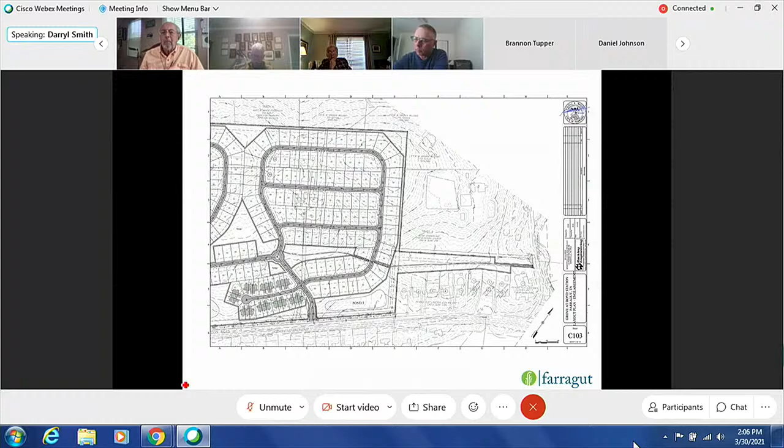My second comment is I heard the discussion today a little bit about some road improvements on Boyd Station. Can somebody talk a little more about that? Darryl, do you want to talk about that a little bit? There's still a little bit of a question about whether or not we're going to have curb and gutter, but we're looking at two 11-foot lanes with a 2-foot paved shoulder on the south side. It would be more or less moving the northern edge of pavement 4 feet out from where it is now.

Preferably at least a 6-foot grass strip over to a 10-foot mixed use path. I'm not sure where that puts the trail with regards to overhead utilities. Russ, you can speak to that.

Yeah, I think the key there is at least a 6-foot grass strip, it may be 30 feet in some places. The trail may need to diverge from being closely parallel to the road in order to get on the other side of the power poles and work its way roughly parallel to Boyd Station. So I think we'd all agree that would be fantastic.

Russ, I did have one question about being able to drain. If we have curb and gutter, do you have elevations as far as the pipes that go under Boyd Station? Yes, I do. Can you send those over to me? Yes, I'll have to get it in a format, I still have it in survey data format. Okay, I haven't got that far yet.

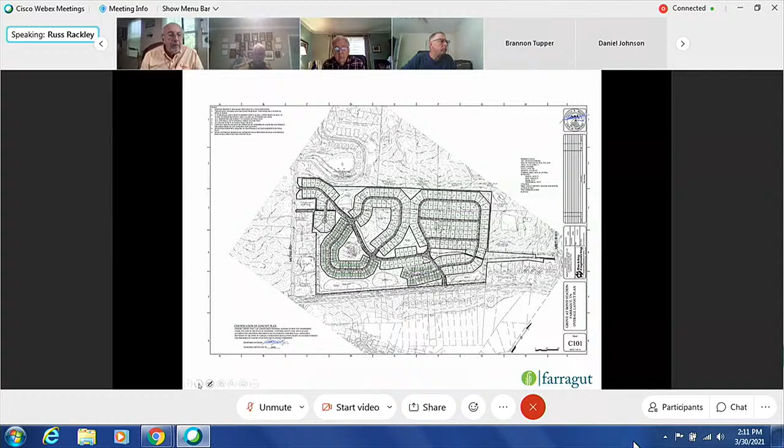Okay, I have one more comment if I can. At the entrance to the development, from the traffic circle over by the park there, if you go in and then take your first right into that little cul-de-sac, those properties along the road there abut 2 or 3 large residential lots that are McPhee Road lots. Will there be any kind of buffer of trees or anything between the development properties and the existing properties? I'm reading Tiffany, Plato, and I can't read Stokes, I guess it is. Will there be some buffers between the existing residents along that road?

Yes, Commissioner Greene, there's a 25-foot common area strip and a 50-foot periphery setback required.

So there'll be no structure within 50 feet of their property line, and any existing tree line through there would be maintained within that 25-foot buffer or 25-foot common area strip.

So I don't think there's any trees there, though, is there? Yeah, there is. The old fence line has some trees on them. It's not a wooded area by any means, but the fence line, or they maybe those property owners' trees, where

they were screening themselves from the cattle farm or the hay field or whatever it used to be. I'm not sure, but we can pull up.

I probably can't get to an aerial that fast, but if you look at - I bring it up because I'm pretty sure we'll probably get a comment like that from the property owners. So you may want to give that some thought.

It would seem to me that, these folks, it seems to me like when I rode down through there, it looked like you could look right through those yards into the field. I don't remember any trees there. So now they're going to look right in their backyard and they're going to have a row of houses immediately on their, I understand there's a buffer zone there.

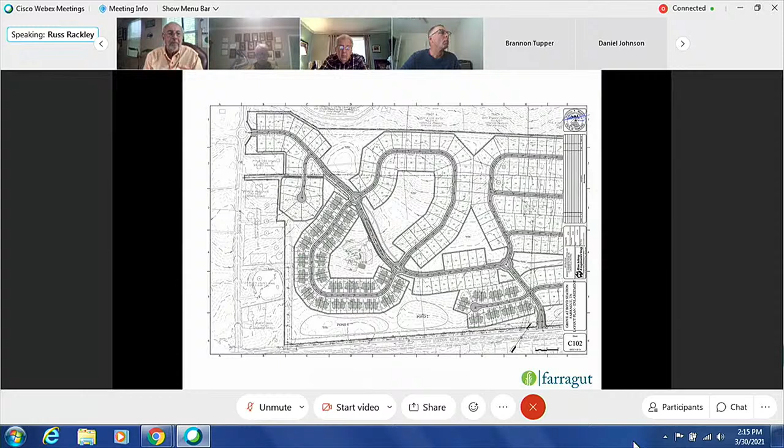So, Russ, I can pull up the aerial if you'd like me to share that. I don't know. I mean, I don't want to get into the weeds on this. Okay, we'll do what we need to do. Maybe I don't want to get into the weeds, but I think I just did.

Oh, sorry, I'd already hit that. No, you're okay, say no more. I think it just went away. I hope it just went away. Yeah, okay, I'm good. That's definitely something we can look at, Mark, but

we'll just see. I think we're already proposing a lot more trees than required, based on replacement trees, because there's not a tremendous amount of trees out here. You think that's crazy for 130 acres, but it's been 98% hayfield for as long as I've been alive that

I can remember, so at least the last 40 years. So other than the old tree lines or old fence rows, that's about the only trees there.

And I'm sure there's some significant trees there that we'll have to calculate a replacement for. But there's no area laid out that's like a big dense wooded area that you would naturally want to save. It's just wide open field separated by fence lines.

So Mark, could you go back? Mark, could you go back to your drawing again? I'm sorry, say that again. Could you bring up the concept drawing again? I'm looking at just - is it not on there?

Is it back up? Nope, all right, let me see if I can get it here. Not sure if that's... Yeah, there, it's up now. Yeah, you got it, all right. Okay, did you have a question about it?

I was looking at the dimension of that buffer zone right where your marker is. It's 25 feet between the residential, at its most narrow place. It's a little misleading on this, it looks tiny, but it's really at least 25 feet, and obviously wider in some areas.

Does this new development have jurisdiction over that 25 feet? The Planning Commission actually has the final say on the buffer arrangement in the OSMR or OSR. On the Ivy Farm subdivision north of Union Road, lots that backed up to Saddle Ridge were required a buffer because the lots are right up against existing house lots, similar to some of this development. Those areas, if they don't have plant material, would need the landscape plan to reflect a new 25-foot buffer planting.

In other areas, they'll probably be beefing up the buffer near the substation area, as protection for this development. So they'll just have to look at the buffer as a whole and figure out where new plant material makes sense and where it's unnecessary, and apply that.

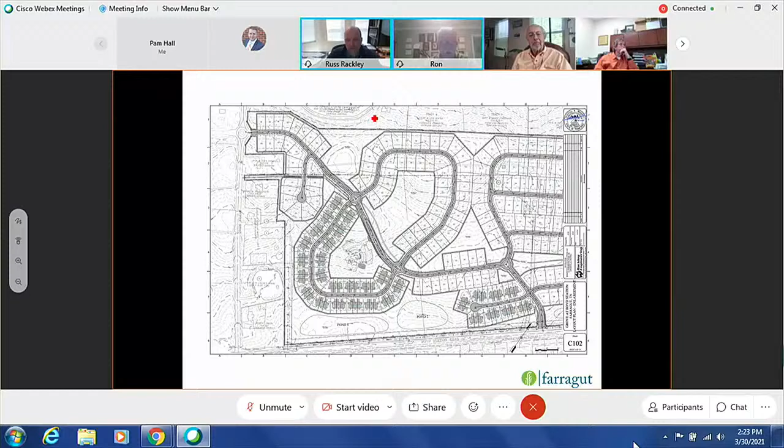Yeah, I've had questions. The other thing that concerns me is we've learned a little bit from Brookmere about the secondary entrance, and that was the reason I asked about the one on Boyd Station. With this big of a development, I would like to see a secondary entrance pretty quick when we start selling houses, because of some of the things you think about when you don't have but one entrance.

Okay, I follow you, and we probably would from a subgrade and gravel standpoint. I don't know that we want to pave all of it, because we've got to get the pump station in, which is going to be down near the Boyd Station entrance, and that's going to have to be operational to serve anything we want to build on.

So even if we want to focus on final paving, curbs and grassing to plat some lots off of McPhee to get some inventory on the books, we'd still have to have a significant amount of the grading and utilities in down towards Boyd Station. So we could definitely have at least a gravel road essentially, even if it's not fully paved or bonded, until we get some of the other grading done in other areas.

So I think we'd have a traversable alternate route just by default of getting the main sewer trunk line down, and anything else that makes sense to get in with or prior to the sewer. I just don't know that we'd put all that asphalt in until we get everything else graded, or else it's just going to get beat up. I'm just looking at something that's passable, okay? Yeah, that's a big concern to a lot of us.

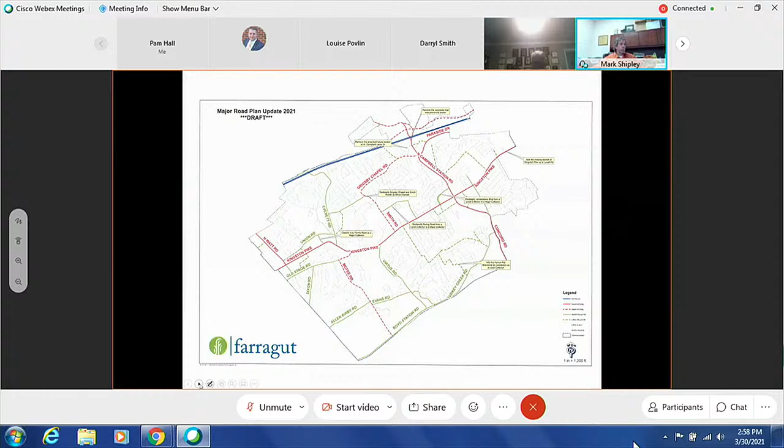So what we would like to do is, if you pulled up the major road plan map and clicked on Virtue Road, it would pull up a cross section for that particular road, something like that. So you could see, for that section of road, this is the vision of what we would like it to be, either as it's developed, as properties are developed along it, or if it's redeveloped, like part of it is right now. What is the vision? What's the cross section for the overall street?

It may just be half of the street at one moment in time, but again, we looked at these back in 2017 when we were talking about the major road plan, and the staff presented 8 different cross sections for collector streets. We had name tags with different street names on them, and you basically stuck the street on a cross section that you thought was appropriate for that street.

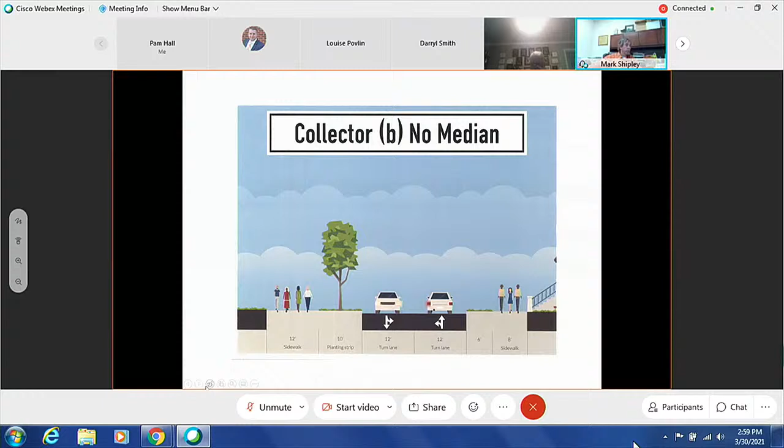So the 2 cross sections that the Planning Commission thought were the most desirable back then - this one was one of them, and there were a few collector streets seen as good candidates for this. I realize there's the lane widths and things like that, and some other discussion points with this, but just to show you some background here.

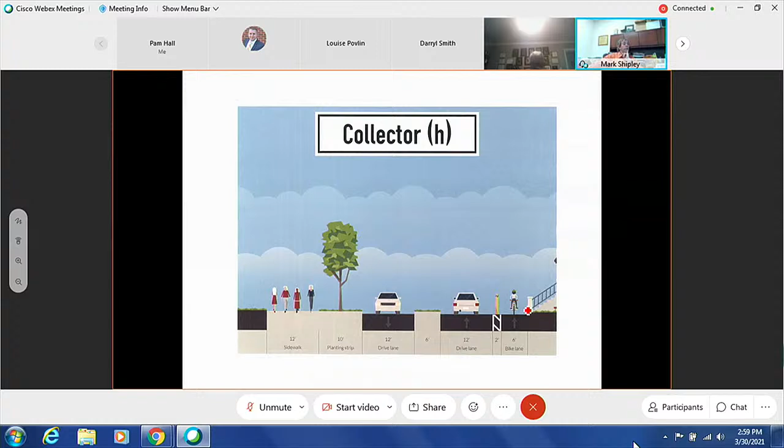And then the other one, which had a median and a bike lane, was a possible option for a couple of the collector streets in the town. I'll show some other cross sections that we put together, which will be discussed at the Planning Commission meeting in a minute - that's what these 4 are.

I think really, before we start looking at the cross sections and the vision of our transportation system, there are some general questions that we need to step back as a Planning Commission and a community and think about. What problems or issues - and I'm going to call it the people movement system, because that encompasses all forms of transportation: bicycles, pedestrians, motorists - what are the problems or issues that we're trying to address with our vision of our transportation system? All these things, there's no real right or wrong, and they're all kind of interrelated potentially as well.

Safety. Providing a better level of service, that's more focused on motorists. Making the community less automobile dependent, so that you can conduct short errands without having to rely on a vehicle. That's really heavily related to planning and land use, and trying to build places that you can walk to - the 20-minute neighborhood concept that we've talked about in the past with the planning commissioners.

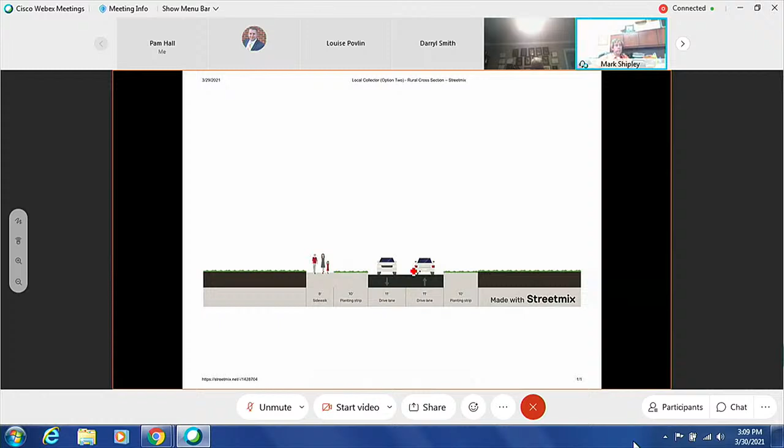You've got basically an open ditch section on each side that's at least 10 feet wide, and then you have some kind of shared-use, multi-use facility on one, potentially both sides, but at least one side. That's going to be a lower traffic generation type street, like Dixon Road right now would be a good example, maybe even Allen Kirby, part of Evans Road potentially.

Then you transition over to the major collector streets. One thing we're talking about internally is that on a major collector, because it has more traffic flow than a local collector, we're considering widening the minimum trail width from 8 to 10 feet where it abuts the actual street. If it's a walking trail internal to a development, it can stay at 8 feet, but next to this major collector, which gets more traffic, we're thinking about increasing it to a shared-use path on both sides at 10 feet.

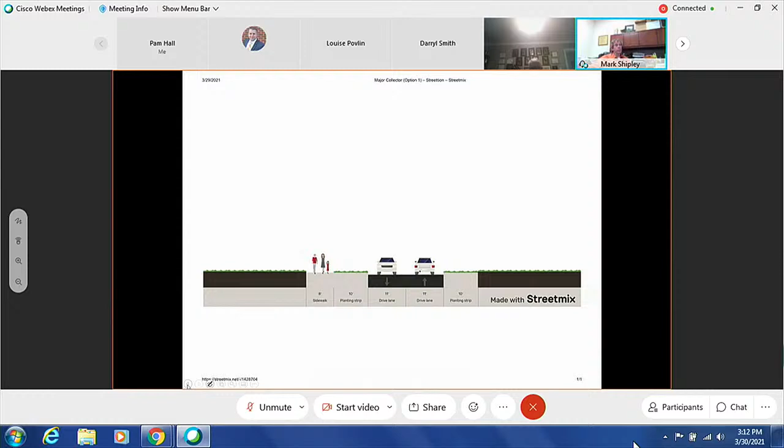So those are the 4 options we were looking at, at the staff level—or at least Bart and myself—just throwing out some options for discussion purposes on these collector streets.

So that's the cross section component of the discussion, and I think the third component is the subdivision regulations themselves. But really, you need to address these bigger questions before making changes to your regulations, because the regulations need to reflect the vision. For example, in our subdivision regulations, we've had some discussion about variances recently that have been granted with vertical curves and things, and then lane widths—what's appropriate for different street classifications. But ultimately what you decide on those is going to be driven by the answers to these bigger questions.

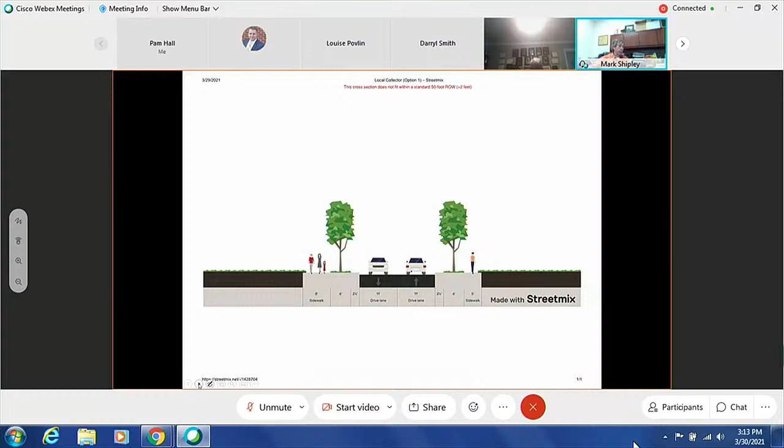There are probably other questions I haven't thought of, but these kinds of questions should really drive your subdivision regulations and potentially some of your zoning. So that's really all I have on this item—I'll open it up for discussion if anybody has questions. That's a snapshot of what we plan to present to the Planning Commission on the 15th. So if anybody has anything to add or change, or if we've completely forgotten about something, let me know and we can talk about it here right now.

I do have a quick question for Darryl. I know as we move through this, a lot of us like to look at it from a community development point of view, but the reality is we also have to look at it from an engineering point of view. So I assume at some point, before we get to suggesting amendments to the subdivision regulations, Darryl will be a big part of this conversation as well. I'm making that assumption—is that correct, Darryl?

That's my plan, yes, absolutely—Darryl and Dan Johnson too. Yeah, absolutely, both. We can't really create something that's not realistic, or that actually creates a more unsafe situation when we thought we were trying to make something safer. So obviously we have to have input from various perspectives to make it make sense and achieve the goals we're trying to accomplish.

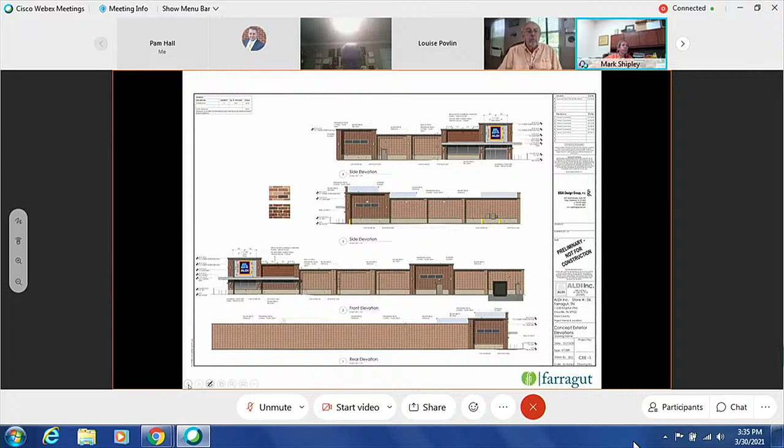Then this was the building elevation that was submitted with this set, just for the larger tenant that would be associated with this project. So, I guess with that, if anybody representing the applicant has some specific questions or comments on staff comments, then we can try to help answer those and go through that discussion at this time.

And Mark, this is Bud Cullum. Thank you. And yes, Bud.

Rest of the staff and commissioners and everyone that's on, thank you so much. Obviously, I think everyone on this call at this point is quite familiar with the project. I have Don Kendall and John Anderson both on, and I'll probably turn it over to them. Yesterday we went through all of the comments, or actually we had been through a lot of them. We went through maybe 4 or 5 that we had some questions we wanted to ask at this particular juncture. So I'm just speaking in general terms, just so everyone will know that things are still moving forward.

We're as excited, probably more excited than ever. We're getting some really good interest on the commercial side from what we feel like are the exact type of tenants, both from a retail and restaurant standpoint, that we had envisioned, and hopefully that the town officials had envisioned also. So we're excited about that.

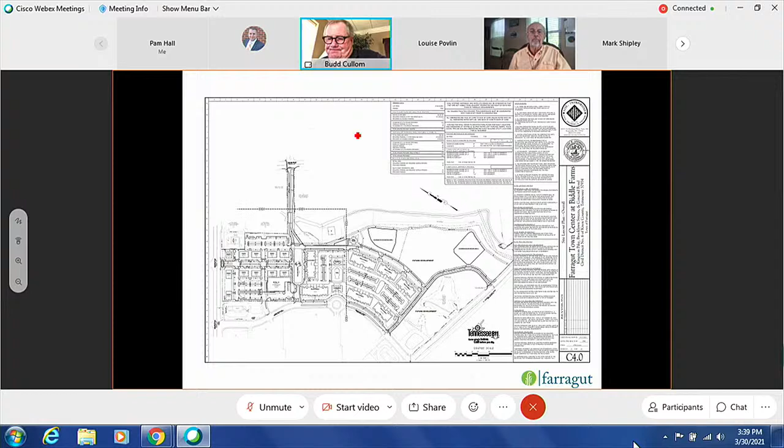I'll be happy to start us off. This is Don Kendall with Development Management Group. Hope y'all are doing well today.

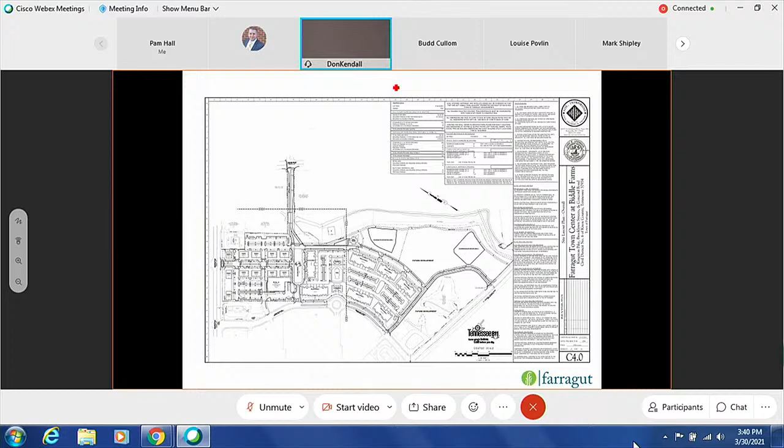John will back me up, but there weren't many items that required much discussion. I think, Mark, there was a comment on the cover page about construction types and calculations and being able to make sure the buildings can be oriented where they're shown. Could you expand on that and tell us what you're looking for? I think we generally know what construction types we're going to have, but between restaurants and retail it could change a little bit. So if you could expand on that and tell us exactly what you're looking for.

Well, that might have been a building code comment. I'm not sure—usually when you talk about construction types, that's either a building or fire code comment. Dan is in the meeting, maybe he can comment on that, unless it was specifically from me. My main concern on the building elevations is just that you have consistency throughout the whole project, and that you meet the minimum requirements, like the 75% face brick, and our architectural design standards. That's really, from my perspective, what I'd be looking at, as far as the type of construction, whether it's type 3, type 2, whatever—that's more of a building and fire code matter they'd have to take up with you, if that's what the question was.

Yeah, I think what we'll do is have the architect get with the codes department and clarify those comments, and make sure we're appropriately addressing the comment in question. Yeah, that's fine.

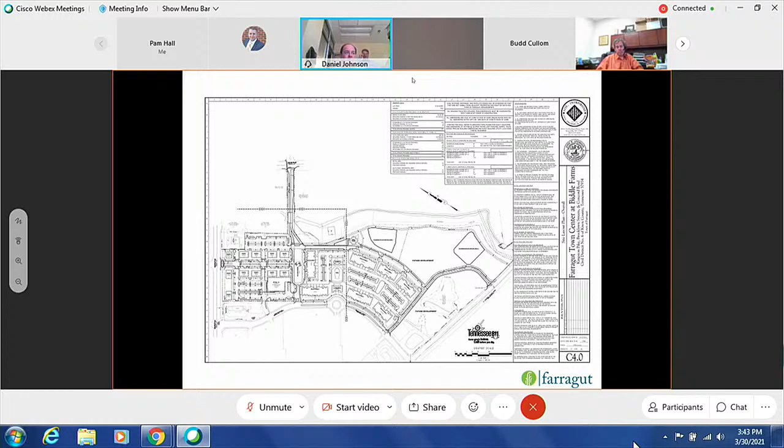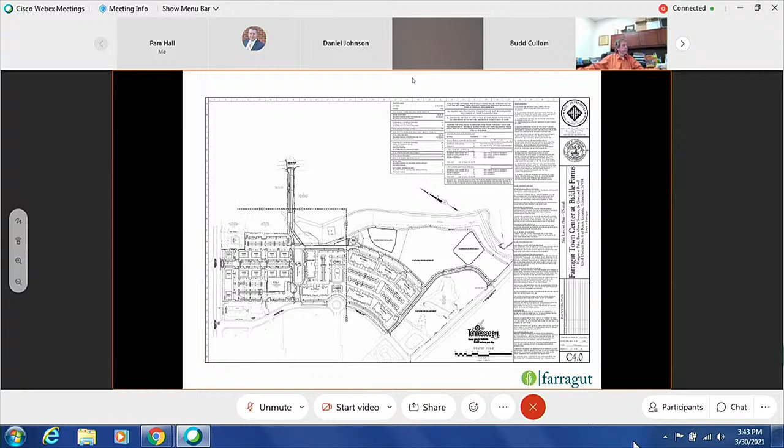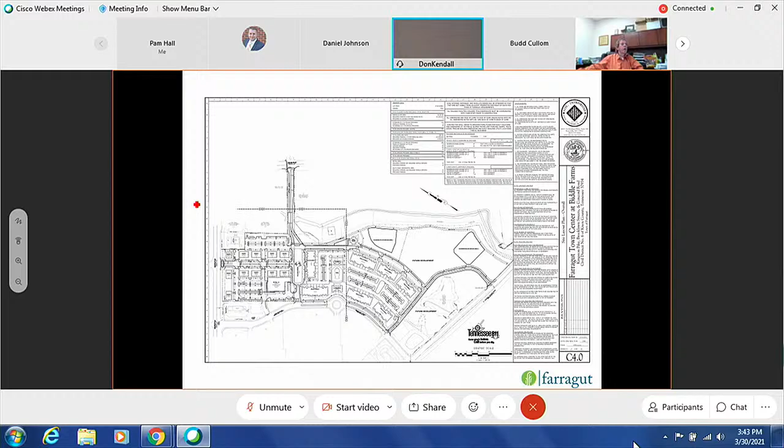The next comment we had was the fire marshal commenting on fire access around the village green area. Currently we're showing a 14-foot pavement width around that circle, no curbs. John, is it 14 or 16 currently?

It's 14 feet, and then there's a 2-foot gutter, so we're showing a 16-foot surface. I believe the comments come back that per the fire code, they want to have a 20-foot there.

We've encountered this in numerous jurisdictions before and seen it treated many different ways. In Nashville, where I'm from, they allow a 16-foot paved area, but then do a 2-foot overhang easement so that the truck overhang, if there is any, isn't impeded by anything. We can provide the 20-foot, but we don't want to take away your green area that you guys were pretty adamant about having. So we're just looking for a little more information on the best way to handle that piece.

Mark, it's Dan Johnson. I can probably speak to that. The fire code is pretty clear on what the width is. However, there would be alternatives to meeting that, perhaps grass pavers or some other alternative material. I would not be opposed to that, but I don't believe there's any leniency shown in those requirements. If the board decided that they wanted to change that regulation, then that's at their discretion. But I am open to alternatives. So if there's a path of X feet and then additional path that is some alternative material that meets the load requirements, then I'm willing to look at that.

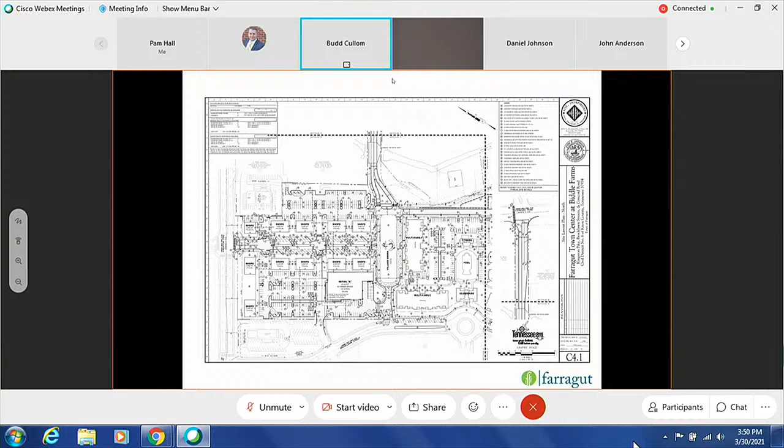Right, correct. Thank you, Mayor. So we'll just use that for all of them at this point.

I think the concern you all have is these 4,000 square foot buildings may end up being one 7,500 square foot building with a lot of outdoor seating. That's what they don't really know at this point. These are to some degree speculative, so there's going to be a little bit of guessing.

I think what we want to make sure is that as you're putting the infrastructure in to service this whole development, you have it in place to accommodate probably the worst case scenario, or maybe best case to me - all restaurants would be kind of nice - but I understand where you're coming from not really knowing that.

I'm sure it's not going to develop with every building being 4,000 square feet, I almost promise you that's not going to happen. So I think for the purposes right now, if we say type 3 construction, 4,000 square feet on these buildings, and if one comes in instead at 7,500 or however it may be, hopefully that's something we can address at that time.

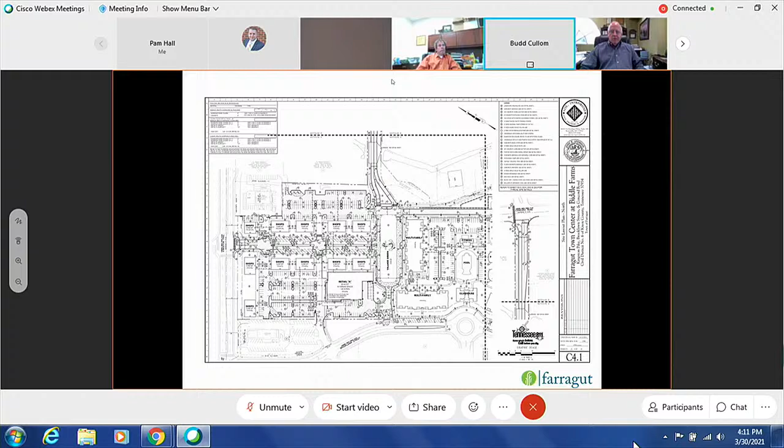Okay, anybody else have anything to add on this item? Other commissioners still on the call want to have any comments? I don't have anything.

Okay, I have just one thing. I'm putting the removal of the old Kroger building on my calendar for July. That's all I'm saying.

Okay. Oh my, I'm glad I don't have my video on. My face would really be red if I messed this one up.

So noted, Vice Mayor. Okay, anybody else?

Okay, well, if you can try to make the revisions by end of Monday, and John, please include a comment response showing where you've addressed the comments, so we can more easily compare it to the initial review, if you don't mind. Okay, that's not a problem.

I think that's all I had on this item, unless anybody else has anything at the last minute. Mark, do you have a list of those comments in Word or any kind of numbered order that would work out? I don't have them in a numbered order, I think I just have them in that grouping I emailed you.

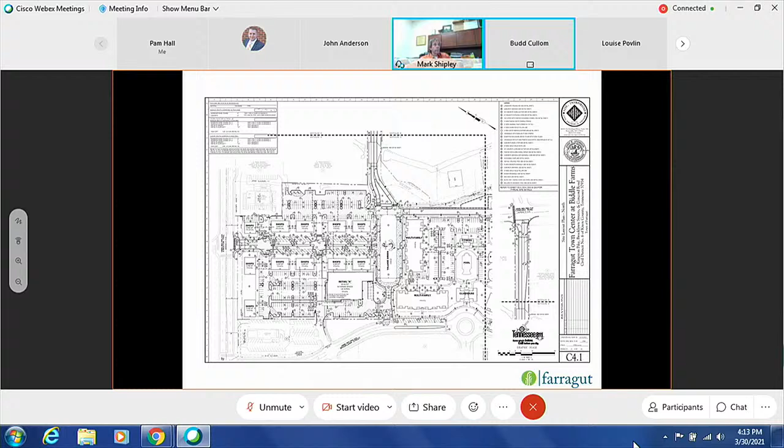No, it was Budd. I didn't mean to interrupt you. I was just— oh, that's all right. Thank everyone again, especially you and staff and all of the commissioners and board members on the call.

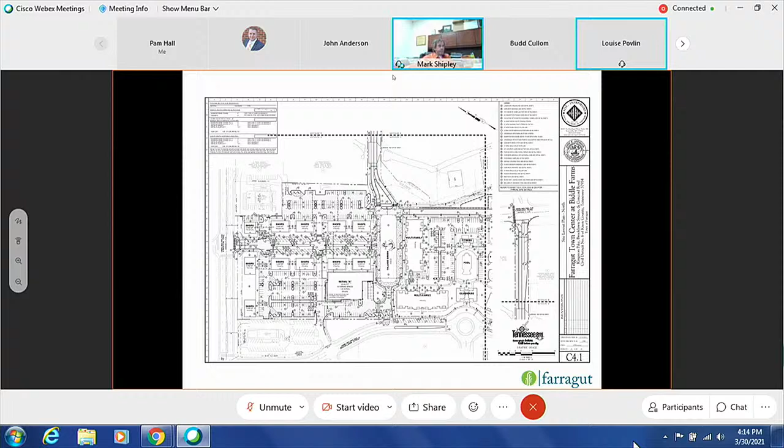I just can't thank you enough for the hard work you all have put into this project. Sounds good, we're excited about it. We are very excited about it. Happy that we can move through this process. All right, thank you. Okay. All right, thank you, y'all take care. Thank you, thanks Mark, thanks, bye-bye. Daryl, all right, thanks a lot.